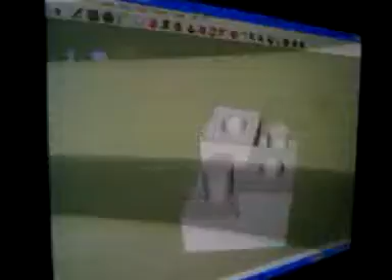So it says the file's read-only? What does that mean? Because it was done with a more recent version? Yes. Okay. So we don't even need the newest version of it, and it doesn't even have to be working properly. That's right. Okay, once you're in and looking at the model, you go to File.

Export, 3D Model, and you want to select from the export type 3DS. And you can name it whatever you want. Call it block. And save it wherever you want to. I'm going to save it to the desktop. And you click Export. So this is saying what the geometry of it is, pretty much? Yeah. Okay. And just tell it OK.

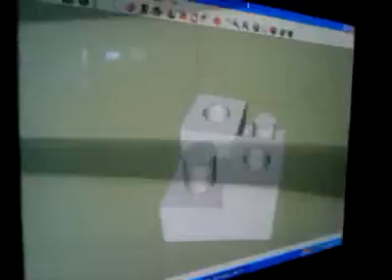Once that's done, you can go to the file and open up MillWizard. And MillWizard is for converting it from the 3DS file format that you just exported from Google SketchUp to the G-code that the mill reads. Have you tried other file formats, or just 3DS and stuck with it? 3DS works. I tried one other version.

What about DXF or STL in MillWizard? DXF can be exported from that same menu in SketchUp, and it accepts STL, but you have to get a plugin to export that from SketchUp. So with this way, you don't need any special plugin. That's right. Okay, that's cool. So you click Select File, and select the file that you just created.

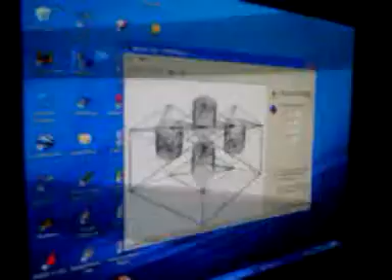And if you created it in inches, then you want to select model was in inches, and you click Next. So this is cut direction, which way it's seeing it from. Right now it's set for cut from top. So you can cut from the sides too, which is kind of nice. Most times it's from the top though. You can resize the model to shrink it if you want, but here you want to move the material position to top, and then continue on.

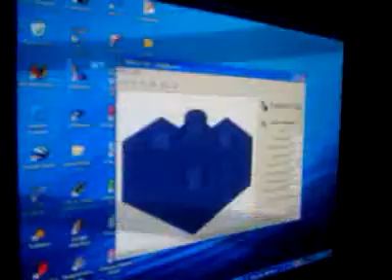You tried doing faster speeds, and the steppers were skipping, right? They were skipping. This is the best combination of length of time to cut and getting what you want out. Okay. And you can select either just the X raster or both. Both will clean up the cut, so I will select both.

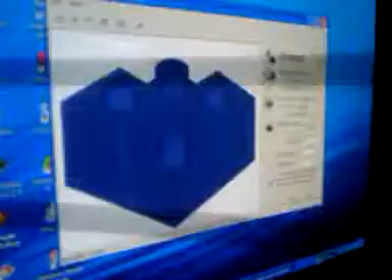And the safe height is how high it goes after the cut is finished. I like to put in 45 because it's in millimeters. That gives you plenty of space to take the block off, even if you've shut the machine off and can't move it anymore. Once you're done here, you click Calculate. I'm not sure why we get that a lot. Still works. So these red lines are where the cuts will be.

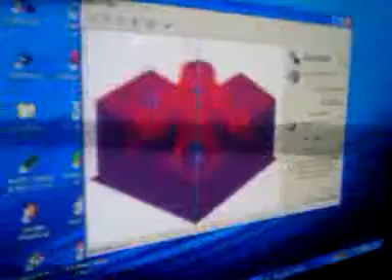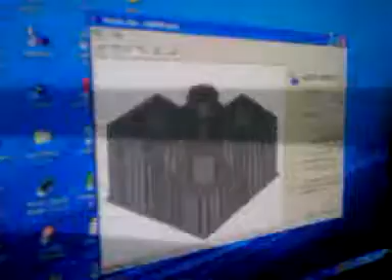And then you can click Simulate if you want, which shows from a solid block what the cut will look like. Then you go on to Next. And in the type of file, you want to select G-code, inch. Got it. And then you click Save Finishing. It always gives you a generic title, so you want to name it whatever you want, and you click Save. Then you are done in MillWizard, and you have your G-code file to send to Mach2 to be cut.

Okay, cool. So let's just see where the file is. It's there on the desktop. Why don't you open that in Notepad and let's see what it looks like. Open? Yeah, see what Open does. And then select from a list. Notepad.

Alright. So what we see here, these are all the G-codes. In here this is the X coordinate and where it will move, and here's a couple Y's, and you might even see some Z's. Oh, okay, the Z's are over here, attached to the X in the same place. And so there's your code. If you want to adjust the code, you can adjust it here too. But there you go. All right, thank you, Pat.